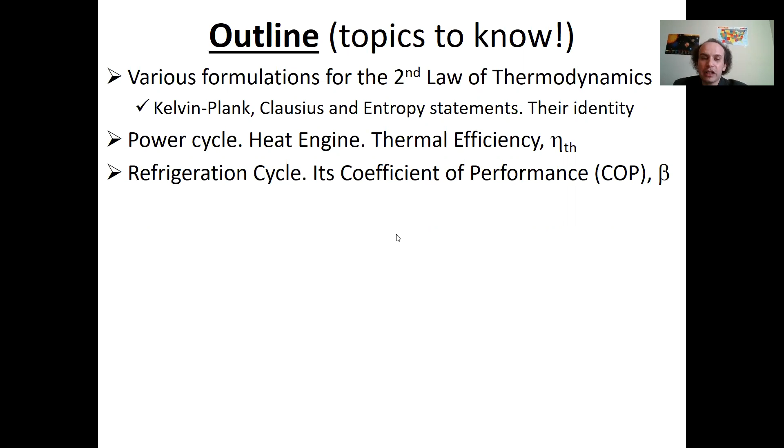Right? You need to know power cycles. What is thermal efficiency and what is heat engine? Remember, heat engine is not just engine, it's an abbreviation. Refrigeration and heat pump cycles, their coefficient of performance, right?

How to calculate. You need to know what is reversible and irreversible process, including internally reversible and externally reversible. What are irreversibilities and what are the measure of irreversibilities? How we measure it, which is entropy.

You should know Carnot principles, which say what is the maximal efficiency, and the formulas for them. And you know Carnot cycle as an example. Don't confuse Carnot cycle and Carnot principles. Carnot is the same guy, but the items are different, right?

The same, like, don't confuse Clausius statement, Clausius integral, and Clausius inequality. Clausius was the same person, but the items are different.

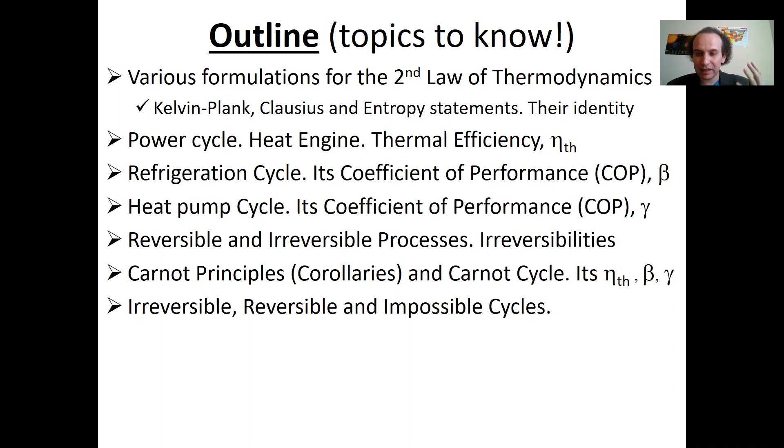In this exam, you really need to know some theory, some philosophy. It's really important. Only when you dive deep in this and understand, everything will be very simple. Now everything is still hard. That's why we have this exam. That's why we want to pick it up before the final.

So you will know Clausius integral and inequality, which allowed us to define entropy. Remember why I write inequality. If you don't remember, it's a good time to rehearse that lecture.

Entropy generation and transfer, entropy increase principle, and entropy balance for a closed and for an open system. Again, remember, we still talk about closed and open systems. And really not nice things that I realized at help sessions.

Sometimes students, especially from other sessions, from Dr. Mabain's sessions, ask me, okay, may I use this formula? If you don't know where the formula comes from, you better don't use it. You better think again, especially when you have homework. The really wrong scenario is when you Google, say okay efficiency, find some formula, and use it.

That's why in class, even in this online class, I try to derive some formulas. When I taught this in person, I derived much more on the blackboard. It's boring, I don't want you to remember derivations, but what you remember is why it comes from. If you derive a formula, you understand why it comes from.

So please remember, first, when you read the problem, see, is it a closed or open system? Control mass or control volume? It's conceptual. If you don't know this, you have no chance to solve this problem. And when you know it, then use the correct formula.

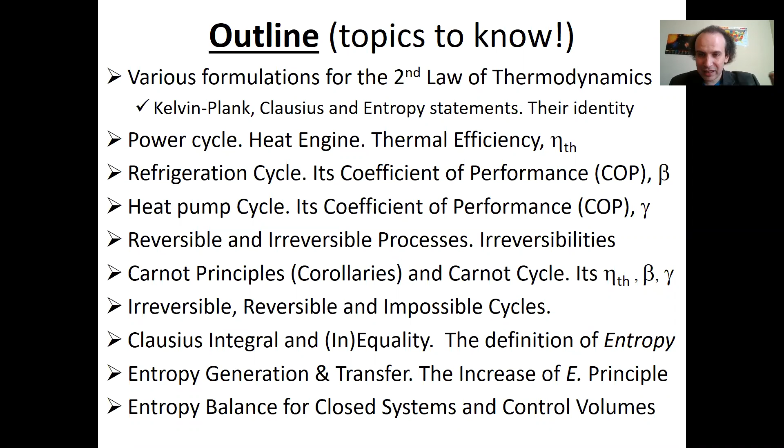Remember, when you talk second law, it works as supplementary to first law. It does not replace it. So key point, and we have this problem in your homework number 6, to make sure that first law works, that the first law is energy conservation. Overall, remember, we have 4 laws of thermodynamics.

Zeroth law, first, second, and third. Zeroth law is simple equilibrium. If you have the same temperature with somebody, you're in thermal equilibrium. Third law, well, it's Nernst theorem, which states that entropy at absolute zero is zero.

But first law is energy conservation, and second law is what we are talking about in this exam. But please remember, if they should work together, they should both work. And if first law is violated, if you have wrong energy conservation, don't consider second law. Second law can work, second law can give you anything. Key point is first law. If first law works, then great, then you will talk about second law, okay?

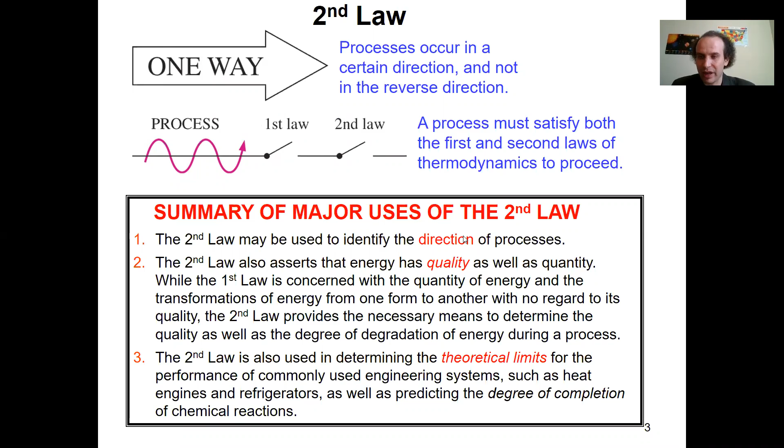Remember the formulations: the Kelvin-Planck statement, which states about heat engine with one reservoir, the Clausius statement, which states about refrigeration cycle, and the entropy statement. Remember that's how we introduce entropy. Don't confuse the entropy statement—it simply states that entropy cannot be destroyed, right?

That's a classical mistake you may see. The Kelvin-Planck statement requires you to have a second reservoir in this device. Everyone can write the Clausius statement, but please don't say it's impossible to transfer heat from cold to hot source. It's wrong, right? Your fridge does it. You should say it's impossible to do it for free.

Your refrigeration does not work for free. There should be another item here—another effect of transferring heat from cold to hot source. Heat goes directly from hot to cold; Ancient Greeks knew this. But how to do it vice versa? Ancient Greeks did not know, but we know it now, right?

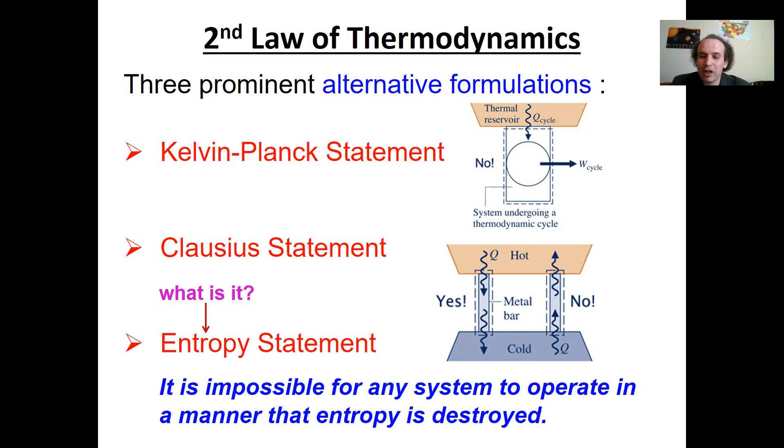Entropy statement: don't say that entropy does not decrease, don't say entropy change is positive. That's only for an isolated system like our universe. Entropy can decrease—when you drink tea from the cup, entropy in the cup decreases. When you put gas or liquid into the fridge, it gets frozen and its entropy decreases. That's okay. The only point is entropy cannot be destroyed. Everybody remember this?

The Kelvin-Planck statement simply says it's impossible for any system to operate in such a manner that heat will be entirely converted into work. It's impossible—you should pay a penalty according to the second law. The second law tells you that nature does not want you to convert heat entirely into work, right?

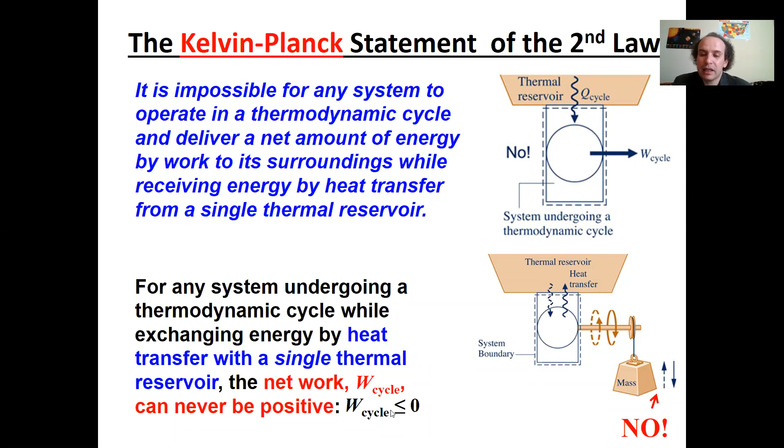Ancient Greeks thought it's impossible; we know it's possible, but you should pay a penalty. What is your penalty? The penalty is that you should have a second reservoir to reject the heat. Another formulation: work over the cycle is non-positive. It's zero if you have a reversible cycle, and negative if you have irreversibility.

The Clausius statement says it's impossible for any system to operate in such a way that the sole result—not the result, but the sole result, that's the key point, don't forget it—is transferring energy from cold to hot body.

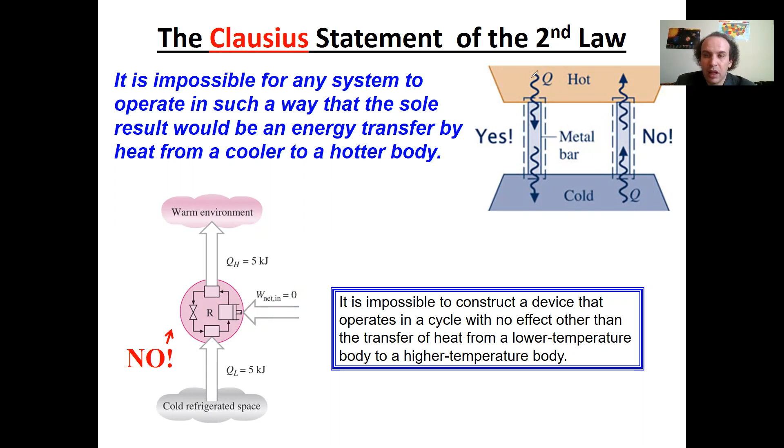Otherwise, refrigerator—this is an example of a refrigeration cycle when you have compressor, condenser, heat boiler, and throttling valve. So what happened here? You need a compressor; you cannot work for free. That's impossible, right? That's what is stated. Your fridge does not work for free, but it may exist. That is the Clausius statement, and you know the equivalent.

What else should you remember? Thermal efficiency—remember what thermal efficiency is from chapter 2. Thermal efficiency is desired over required, nothing else. What is a heat engine? Please understand, heat engine is not like the engine in your car. It's maybe a heat engine, HE—it's any device converting heat into work.

What do we know about heat engine? What do we want from it? We want work output. What do we need? QH. So the ratio is your thermal efficiency, right? What do we know about thermal efficiency? Even from chapter 2, we knew thermal efficiency is from 0 to 1—it cannot be more than 1 because only part of the energy can be converted. But now we know it's not only less than 1, but less than some maximal value given by the Carnot heat engine, right? That is thermal efficiency.

Is everything trivial in what I'm talking about now? It should be trivial for you. If you understand everything, it's great. If it's not trivial, that is your trouble—look here in detail and solve the respective problem.

Refrigeration cycle—what is it? The idea is about a fridge transferring heat from cold to hot source. That's how it looks like. Here we have a concept of coefficient of performance, COP. For refrigeration cycle, we call it also beta. So what do you want from your fridge in your kitchen? What do you want?

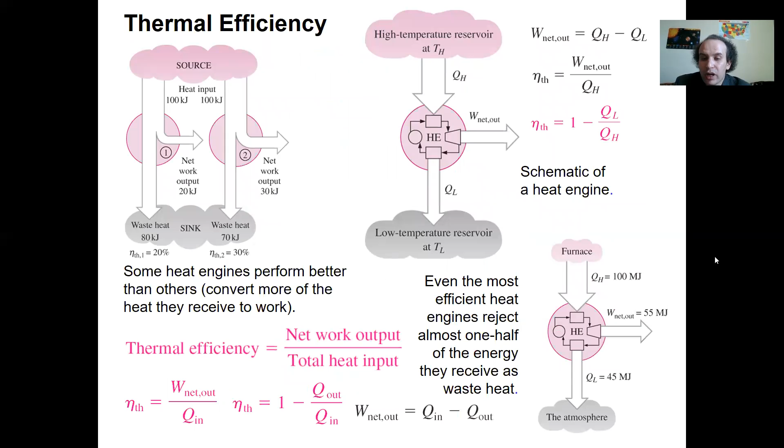Now, another point. Here we talk, and many people get confused sometimes here. Here we talk about absolute values. In all these formulas, all values are absolute, are positive, right? But at the same time, you may realize that when you talk about work input here, generally speaking, it's negative, because you go counterclockwise. If you look at this cycle, it goes counterclockwise. So this work is negative, this work is done on the system. So we took absolute value, but logically it's negative. Well, if you talk about heat engine, it's clockwise, and work output is positive because it's done by the system.

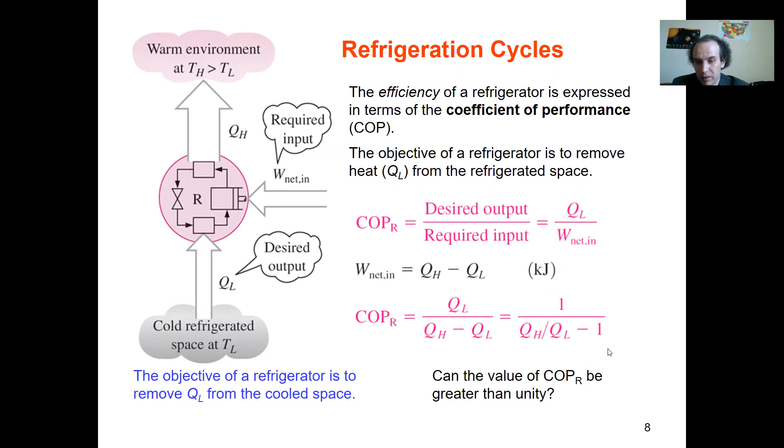Again, don't confuse chapter 4 and chapter 2. Remember our convention: work done on the system is negative, work done by the system is positive. It's conceptual. Does it make sense? So that's what we discussed. That is a major point, that's what we need.

Then we came to the point of irreversibilities. Irreversibility is anything that makes your process not idealized. Like, remember: heat transfer through finite temperature difference, spontaneous chemical reaction, spontaneous mixing, friction, dissipation, solving, inelastic deformation. Everything that is irreversible is something that you crush and you cannot go back. You dissolve sugar in liquid, you cannot just get straightforward this back. So the processes we deal with, most of the processes we deal with, are irreversible.

And the more irreversible they are, the less your efficiency will be. And that's why, actually, we come to second law. Nature does not want irreversible processes, even though all of them are irreversible, because every irreversible process is one step toward the thermal death of the universe. So that's why nature asks you to pay a penalty when you have it. And that's what happens, so you do have irreversibilities, and entropy, or to be more accurate, entropy generation, is a measure of irreversibilities.

The more irreversibilities you have, the more entropy generation there will be. How do we calculate this entropy generation? We'll talk about it later, but realize there's no simple calculator where you count one irreversibility, then a second, and put it in a box. There's no formula like this. To calculate entropy generation, you should write a balance equation and find all other terms, then you'll find how much you spend.

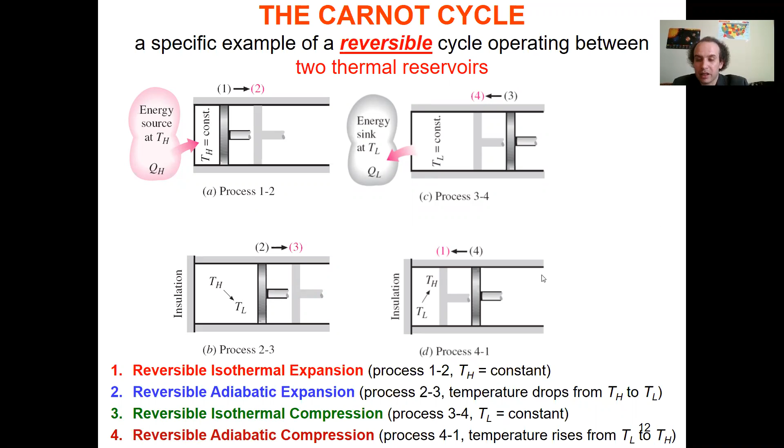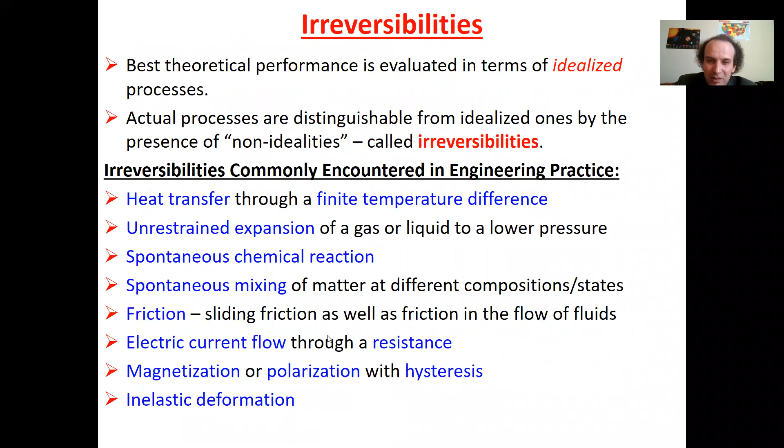Remember, when I talk about Carnot principles, don't confuse the two. If I ask you for Carnot principles, write down Carnot principles—don't say Carnot cycle. They're two different items. Carnot cycle is here, Carnot principles is here. So the same Carnot principles apply to heat pumps and refrigeration cycles—I can say the same conclusion, right?

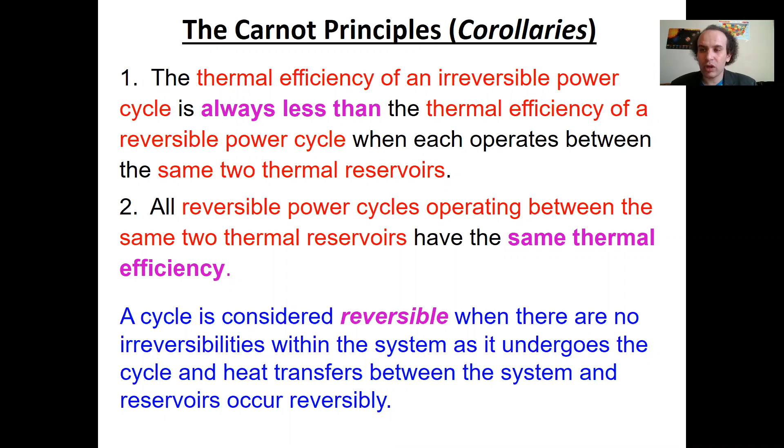All reversible heat pumps will have the same efficiency, provided they have the same reservoirs, and all other heat pumps will have less efficiency, correct? So that is what you may realize. That's how it looks like.

And remember, we discussed in the TS diagram how it will look like. In TS diagram, it will be a simple rectangle. Remember, we did it in class.

And if you have the TS diagram, it will be what? It will be just something like a rectangle, right? If you have TS, it's understandable because you have two isotherms and two adiabats.

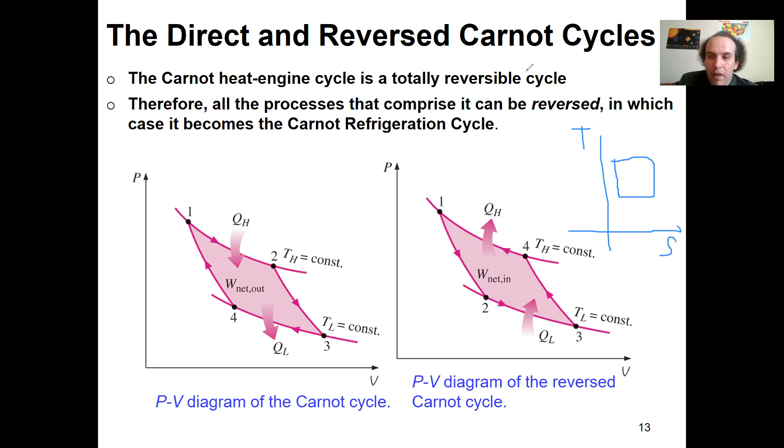So what you should remember about thermodynamic cycles: power cycles convert heat to work, I recall it, fridge and heat pump transfer heat. So what you may see here, that's how they look like.

And you remember these formulas, right? So basically what you see in all these cases, you have two equations to describe it. These are two equations, right? If you have two equal signs, you have two equations.

You have two equations, and you have four variables here, right? So you need to know two of them to identify two others. True? You know two of them, you will identify two others.

So that is it. And very often you don't know, you may have only one of them, and you have the question: where can I get something else?

At this point, please read the textbook, because very often it may be that it's a Carnot cycle that you can compare to.

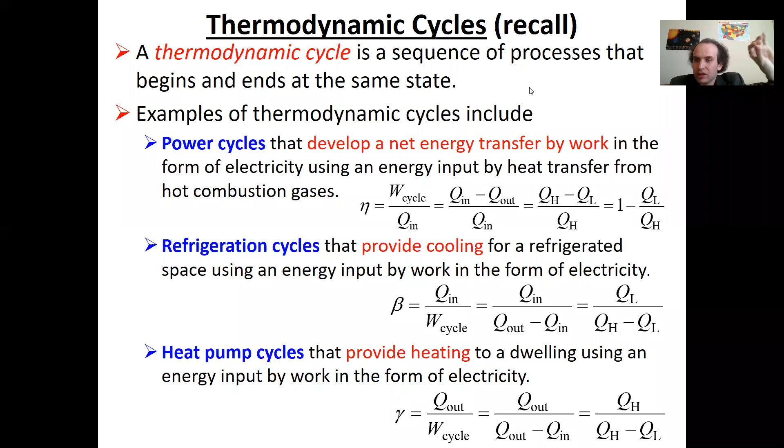It may be stated that it's a reversible heat pump, or Carnot heat pump, or heat pump with maximal coefficient of performance. Maximal, reversible, Carnot - it gives you a hint that it's here, and you know these formulas.

Maximal efficiency, maximal for beta, maximal for gamma, right? That's how we calculate. Everybody remembers this formula?

Very important: these formulas are in Kelvin scale. 20% of you are going to make this mistake in your test, confusing Celsius and Kelvin scale. It should be in Kelvin.

If you have it in Celsius, convert into Kelvin. These formulas are from absolute zero. That's how, remember, Kelvin identified absolute zero.

He stated that I need a new temperature scale at which heat ratio gives you temperature ratio. That's how we define the absolute scale. That's the Kelvin scale. Don't use Celsius here.

And this gives you a hint how to identify the nature of the process. It can be eta, beta, gamma, whatever it is. Please check, please check what it is and state.

What's the process you're talking about? Find your efficiency, which you have in reality, and find the maximal, that is the Carnot efficiency, and check.

If yours is less than maximal, it's okay. So you deal with an irreversible scenario, an irreversible cycle, which may happen in practice.

If your efficiency is equal to maximal, what can you say? It's theoretically possible. I would not recommend you invest money in this, but theoretically it's possible.

You cannot decline it. But if your efficiency looks larger than the Carnot efficiency, that's impossible. I said efficiency, but the same applies for beta and gamma.

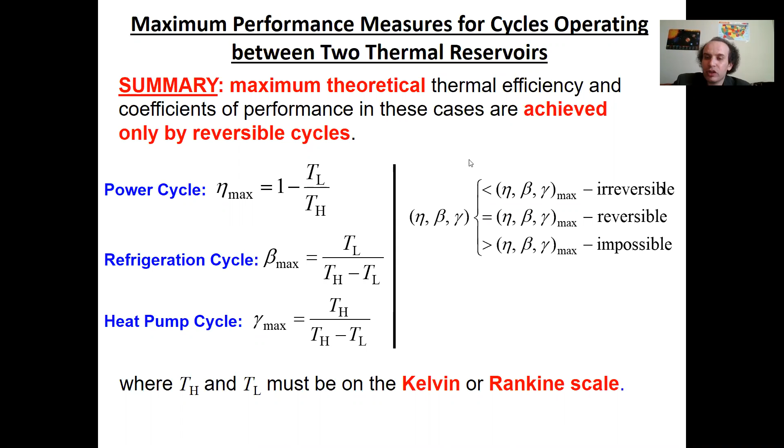That's the way how you approach it. That's one way. And in chapter 7, you have another way to solve it by means of the Clausius integral, right? Clausius - what is the Clausius integral?

Remember Clausius inequality? We developed it through this integral. So that is the Clausius integral.

You calculated through sigma, remember? And you calculated here that if you calculated sigma as follows - remember about this conventional sign, minus.

And what you have here is the same story as before. Sigma, actually, is a measure of irreversibilities. Later it will be called a measure of entropy. It's like a dimension of entropy. The same story as you see here - you may calculate sigma like this.

If sigma is positive, then there are irreversibilities, it's okay, you pay some penalty. If sigma is zero, it's theoretically possible, a reversible scenario, reversible process. Eventually, if sigma is negative, that's impossible.

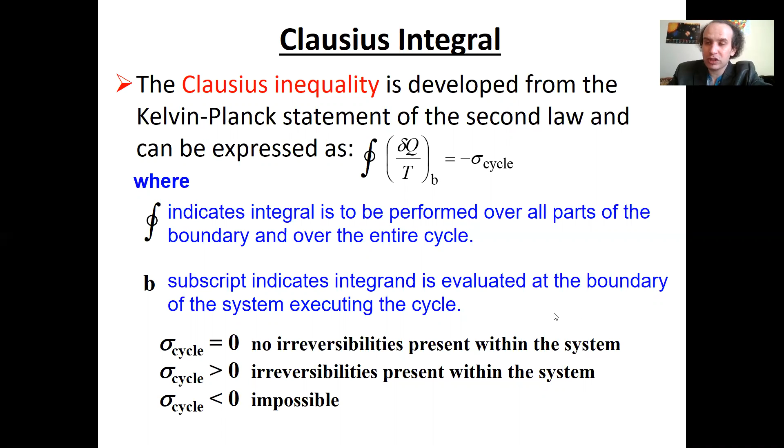You can get bonus tickets in my class, but you cannot get bonus tickets for best driving, right? It's impossible. And you remember how we arrived at Clausius inequality?

This is Clausius inequality. Why do I call it inequality, in brackets, in parentheses? Because it may be equality if you talk about an internally reversible scenario. So remember this: if you have the integral dq over t, this integral is non-positive.

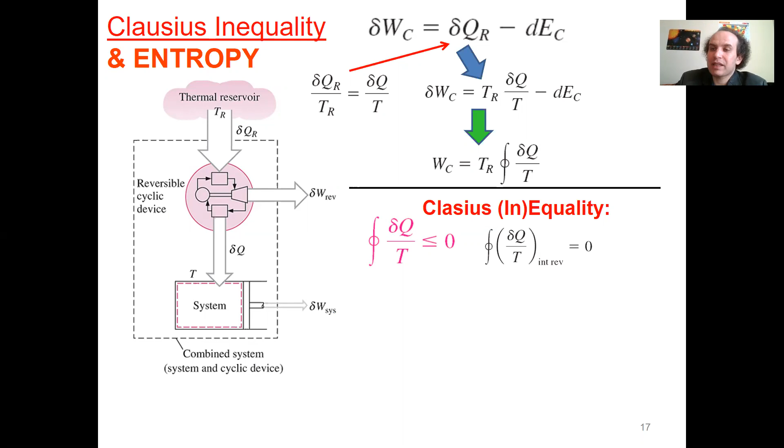I may ask this question in the exam. Please remember, it's non-positive, and it's negative in realistic scenarios, it's zero if you have an internally reversible process. That's Clausius inequality. Don't confuse with Clausius integral, don't confuse with Clausius statement. Clausius is the same guy, items are different.

And why do we need this? Because that allows us to define entropy. Remember, entropy is such a function whose change is given by this. So it has the same units as specific heat, heat capacity, it's energy per temperature, but it's a different item. And that's how we define it. So that's what you remember. That's how we define entropy.

And when you define delta S, you should find some reference frame. Our reference frame is very simple. We say that entropy is 0 at absolute 0.

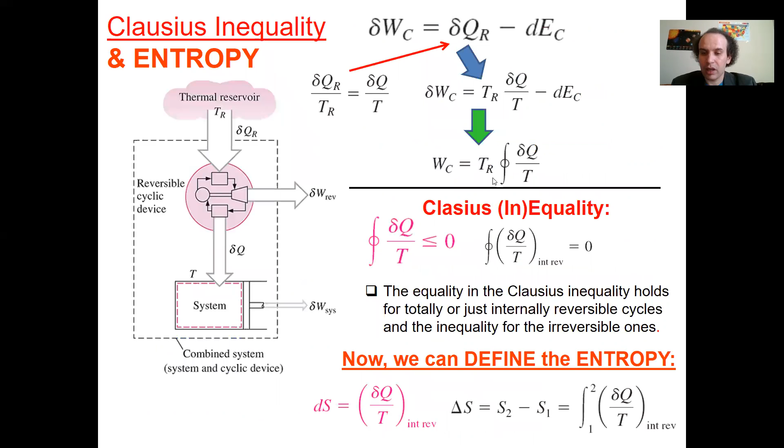So that's what you should remember about entropy, about entropy generation. I'll tell you 4 approaches to entropy. Philosophical approach, my approach, personal approach, that you pay a penalty according to the second law. If you want to convert heat into work, if you want to transfer heat from cold to hot source, you should pay a penalty. And the currency in which you pay this penalty is entropy, also entropy generation. So that's one approach. Second approach, you will have a formula for it. Here is a formula.

Third approach, entropy, especially specific entropy, it's an item from your tables. And whatever you did with U, H, and V, you should do with S. Specific entropy is an item from your table. And also, entropy is a measure of disorder. If your system is more free, its entropy is high. If the system is more ordered, its entropy is less. That's why if you heat the system, you increase entropy, right? If you pressurize the system, you decrease entropy. It will be a function of P and T, like it should be.

Now, what you must remember, entropy generation is that penalty that you pay. If a police officer stops you and you don't get a ticket, you can hide that you were driving. But if somebody stopped you and gave you a ticket, the ticket is with you. This ticket appeared from nothing, and you cannot get rid of it. If you don't pay it, you will get an extra ticket and eventually you will be jailed. So you increase entropy, you increase your crime. You can ask your friend to pay your ticket for you, but you cannot destroy it, right? This ticket is with you, it appeared from nothing.

And this ticket cannot be a bonus ticket, right? This ticket cannot be negative. It's impossible that a police officer stops you and says, okay, this is your award for best driving. No, this ticket is only your penalty. And if tomorrow and all the days after tomorrow you drive perfectly, this ticket is still with you. You cannot reimburse it. So that's entropy generation.

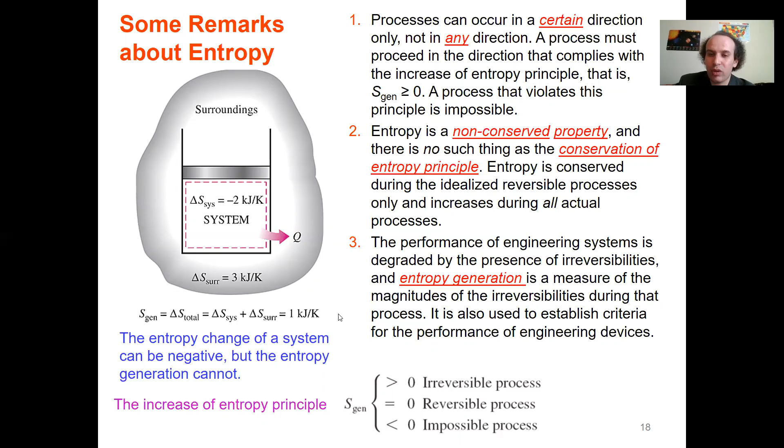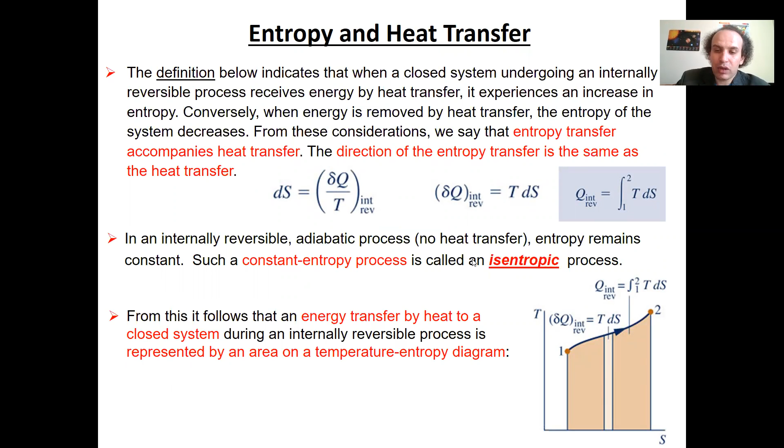So there is no entropy conservation. Entropy can appear from nothing. Now look here what we say, remember we discussed it in class. In simple words, entropy change in a system will be entropy transfer through the boundaries.

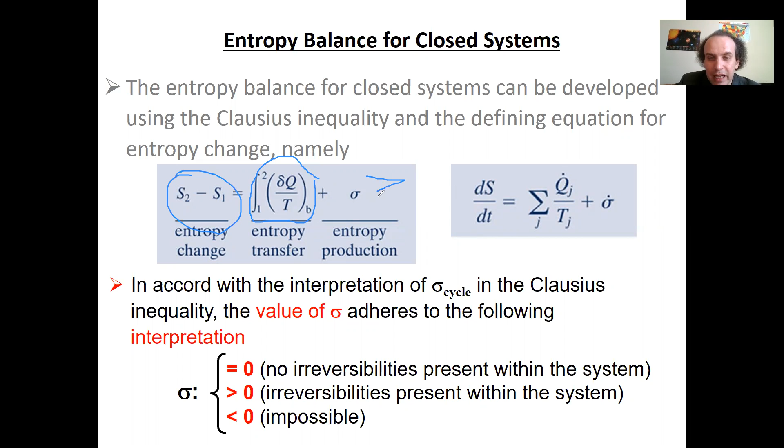Second term is entropy due to heat transfer. This term can be positive if you have heating, negative if you have cooling, and zero if it's an adiabatic system. But sigma, entropy generation, is non-negative. It can be zero if you have an internally reversible process, otherwise it's positive. So all other terms can be positive, negative, or zero, and that's how you come to the question of whether it's positive or not.

Now remember, from what we say here, if you have an internally reversible process and adiabatic, what does it mean? Let me write down some text here. If I have an internally reversible process and I have adiabatic, then it's isentropic. Then it's isentropic.

Isentropic, why? Look here, what does it mean that my process is internally reversible? It means there will be no sigma term here. What does it mean that my system is adiabatic? No heat transfer. So if this is 0 and this is 0, this will be 0.

But it's not vice versa. Because I may have an isentropic process where this is 0, this is positive, and this is negative. So I may have isentropic cooling. The temperature will go down here, there will be some entropy generation. I may have isentropic cooling, but I may not have isentropic heating. I may not have like this.